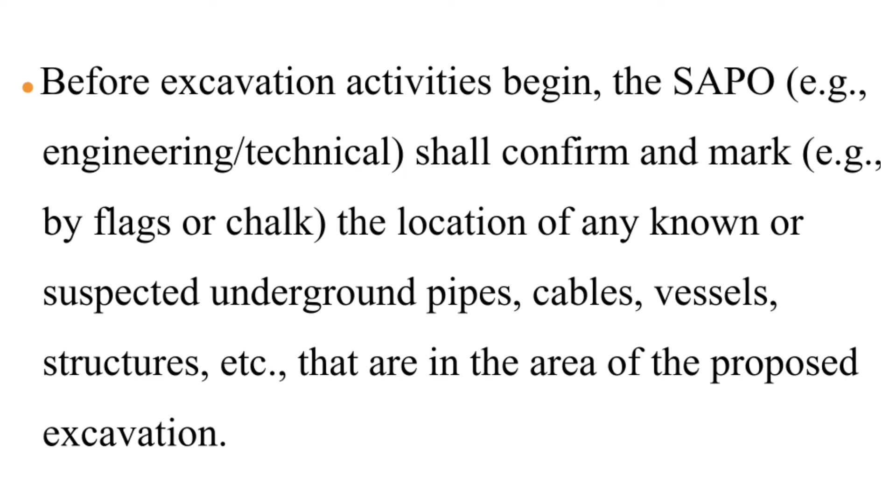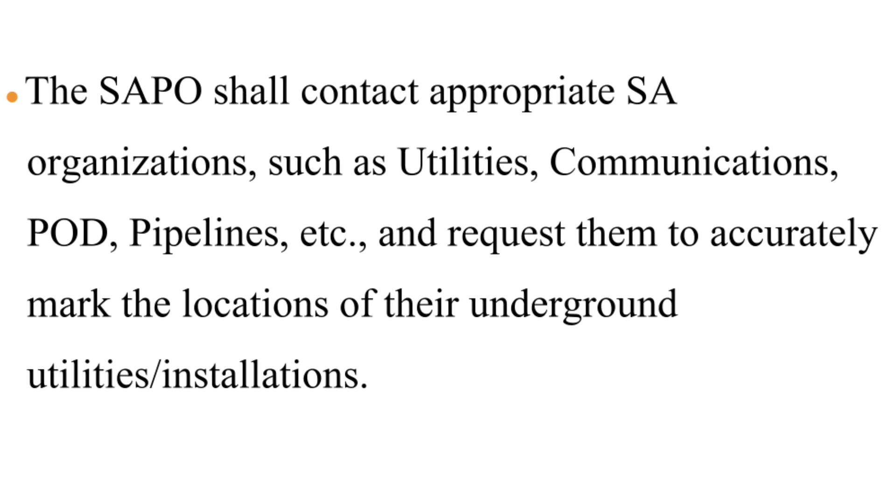The Saudi Aramco Proponent Organization (SAPO) shall contact appropriate SA organizations, such as utilities, communications, POD, pipelines, etc., and request them to accurately mark the locations of their underground utilities and installations.

The Saudi Aramco Proponent Organization (SAPO) shall ensure that non-SA underground cables or utilities are also located and marked prior to excavating. Saudi Aramco Proponent Organization (SAPO) inquiries may be addressed to Government Affairs.

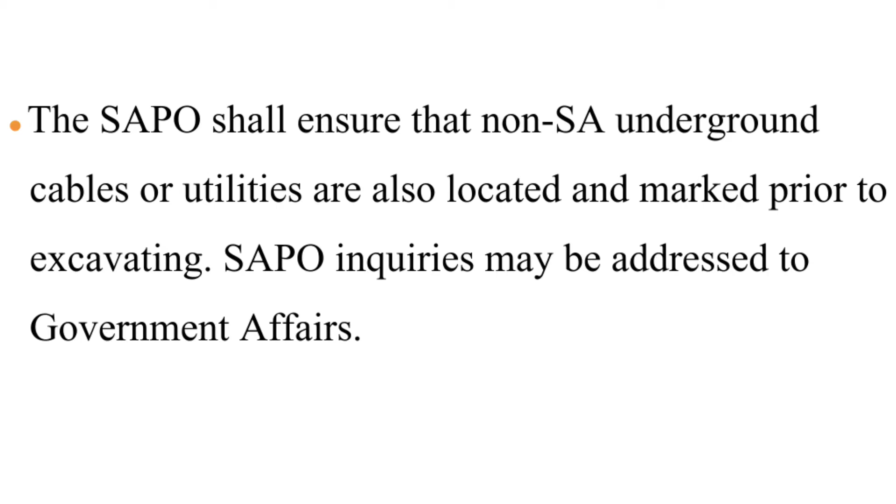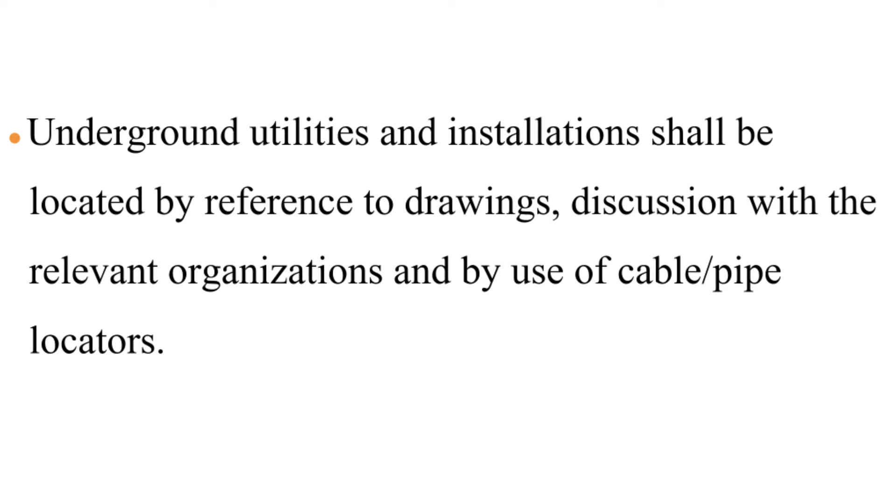Underground utilities and installations shall be located by reference to drawings, discussion with the relevant organizations, and by use of cable and pipe locators. Mechanical excavators shall not be used until all underground utilities and installations have been exposed by hand digging.

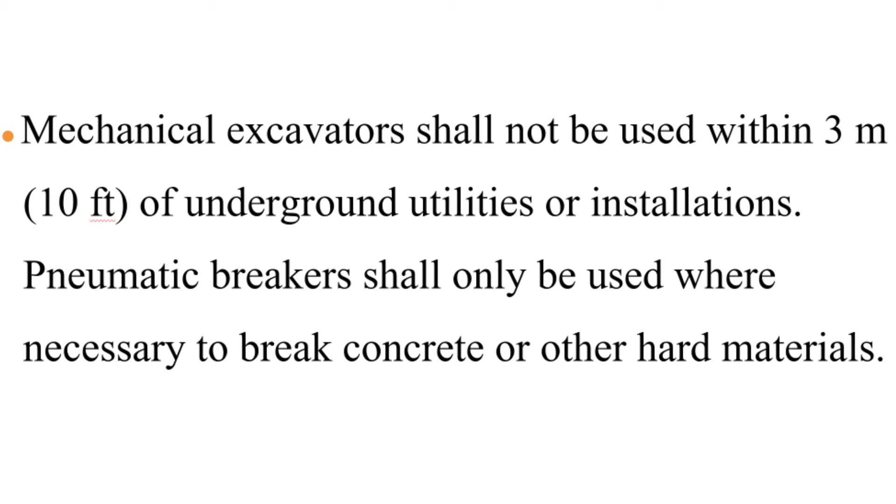Mechanical excavators shall not be used within 3 meters (10 feet) of underground utilities or installations. Pneumatic breakers shall only be used where necessary to break concrete or other hard materials. Excavations are not permitted under an existing foundation.

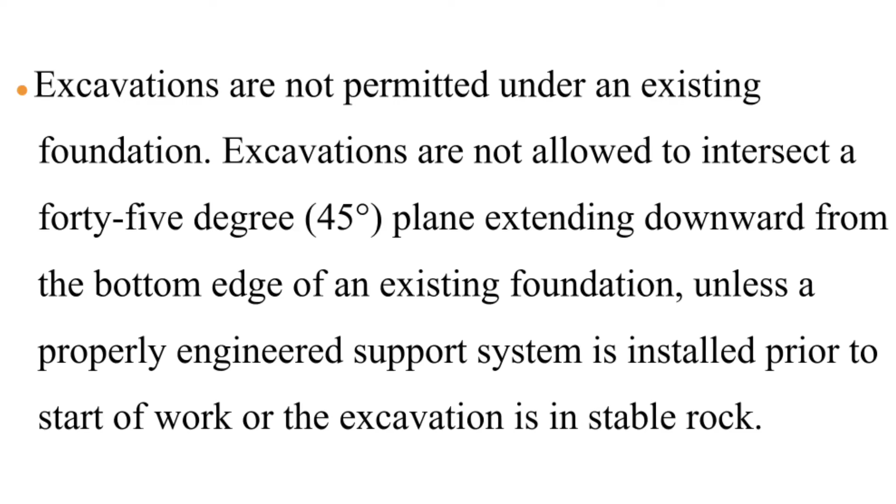Excavations are not allowed to intersect a 45-degree plane extending downward from the bottom edge of an existing foundation, unless a properly engineered support system is installed prior to start of work or the excavation is in stable rock.

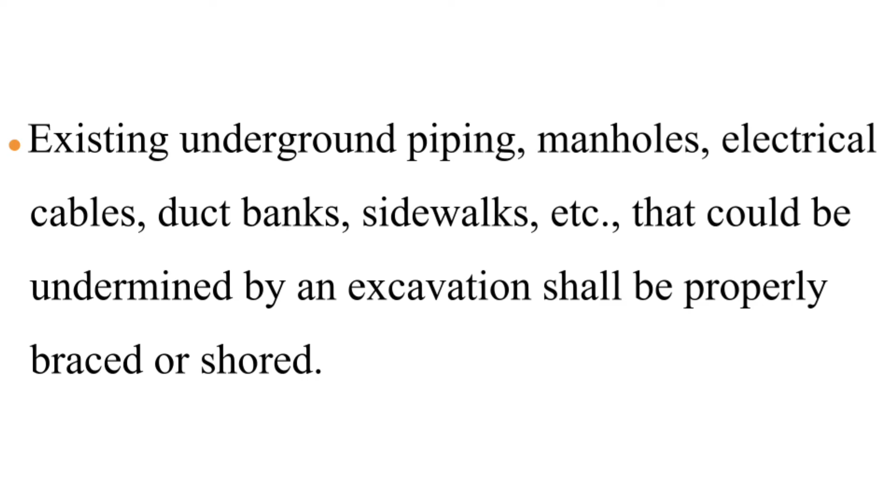Existing underground piping, manholes, electrical cables, duct banks, sidewalks, etc., that could be undermined by an excavation shall be properly braced or shored.

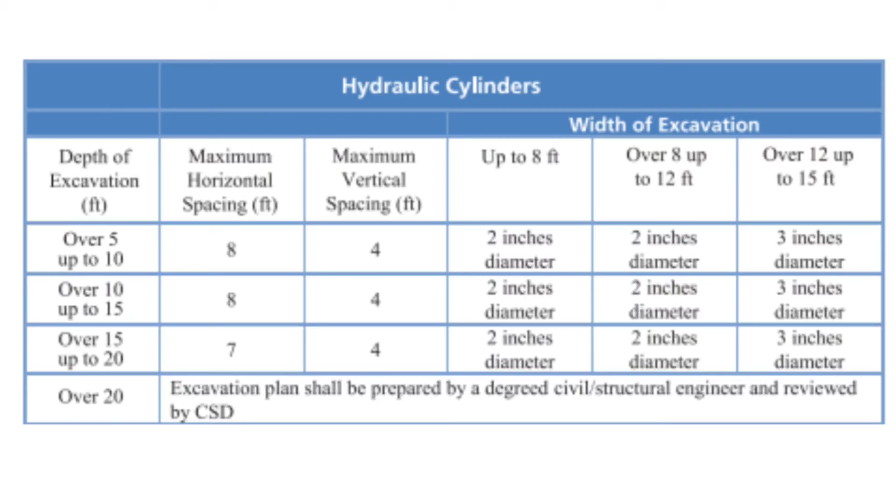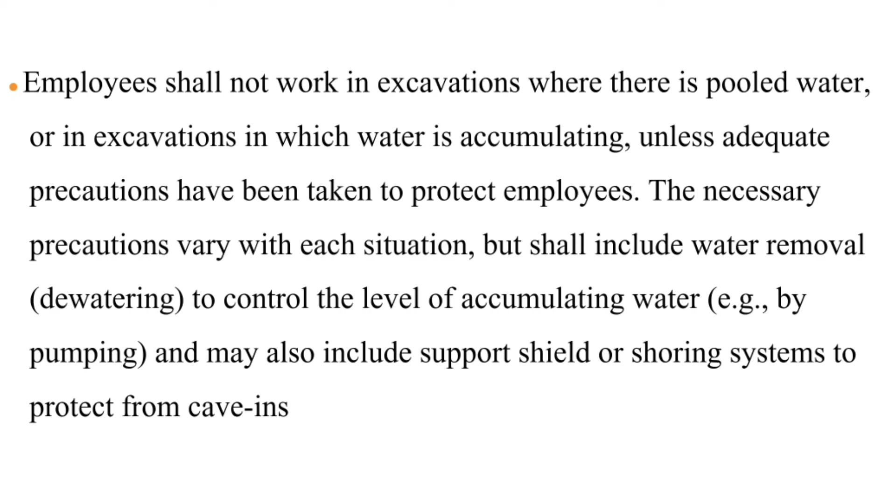Dewatering. Employees shall not work in excavations where there is pooled water, or in excavations in which water is accumulating, unless adequate precautions have been taken to protect employees. The necessary precautions vary with each situation, but shall include water removal (dewatering) to control the level of accumulating water, for example, by pumping, and may also include support, shield or shoring systems to protect from cave-ins.

If water is controlled or prevented from accumulating by the use of water removal equipment, the water removal equipment and operations shall be regularly monitored to verify proper operation.

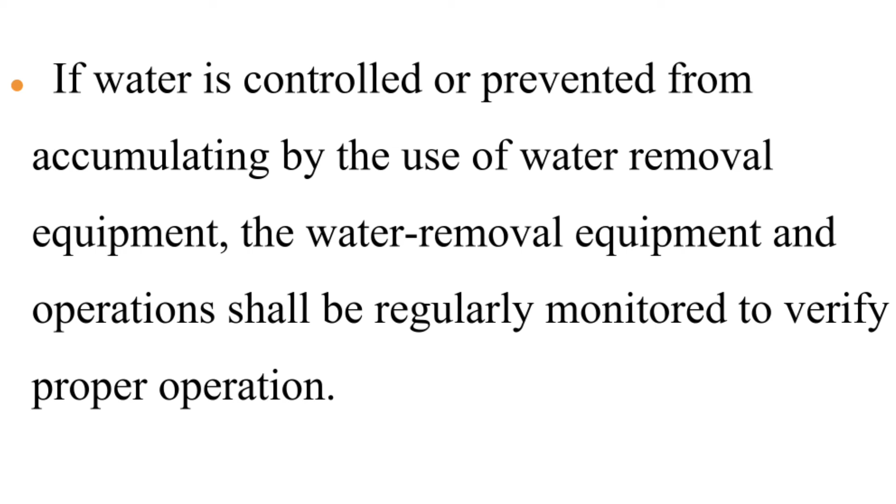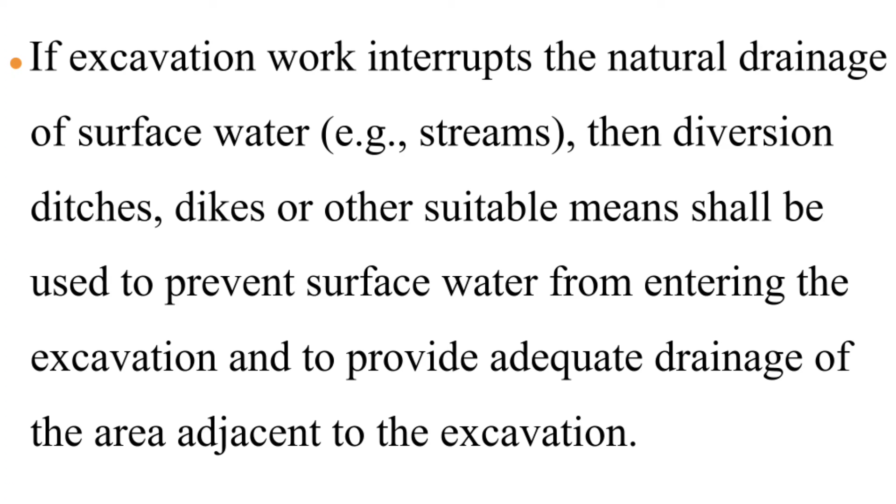If excavation work interrupts the natural drainage of surface water, for example, streams, then diversion ditches, dikes or other suitable means shall be used to prevent surface water from entering the excavation, and to provide adequate drainage of the area adjacent to the excavation.